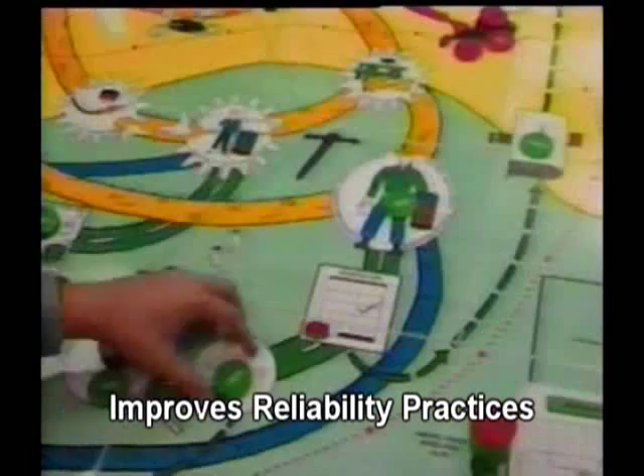The manufacturing game is an interactive simulation that has helped numerous facilities around the world vastly improve their reliability practices in a short period of time by building the culture required for significant and lasting change. Our unique integrated approach aims to help organizations realize their full potential by encouraging frontline workers to better understand their role and take responsibility for their performance as it relates to the functionality of the entire plant through defect elimination.

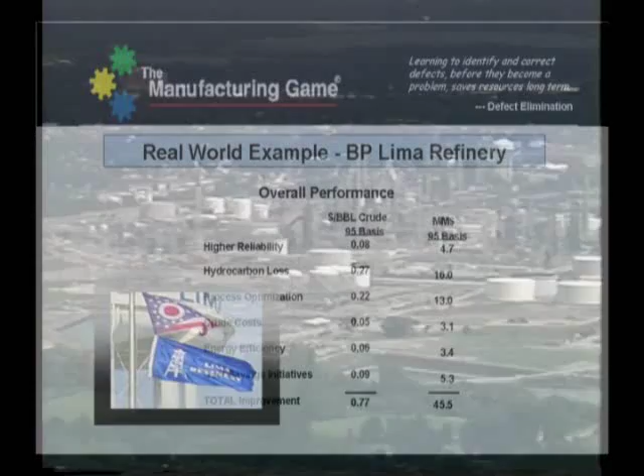One example of how well the manufacturing game works is a refinery in Lima, Ohio. Because of their participation in manufacturing game workshops and defect elimination practices, they improved operational profits by over $40 million a year, tripling their earnings in 3 years.

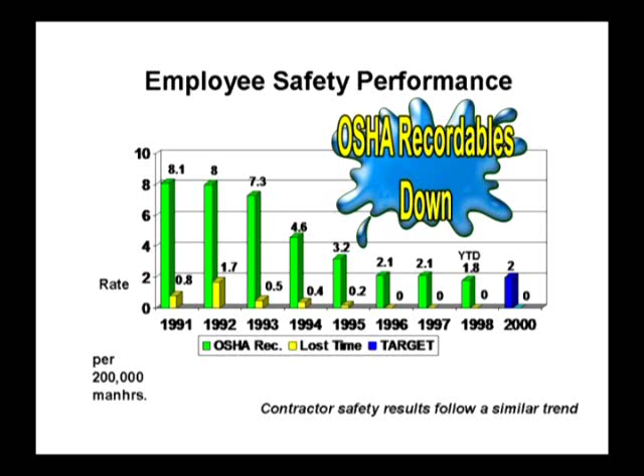During that time, not only did safety also improve, but OSHA recordables dropped from 8 per 200,000 man-hours to 2, and they experienced 5 years without a lost workday case. Environmental impact was reduced, contributing to profit by reducing crude losses from 1.3% to 0.3%, a pace-setter performance for any refinery.

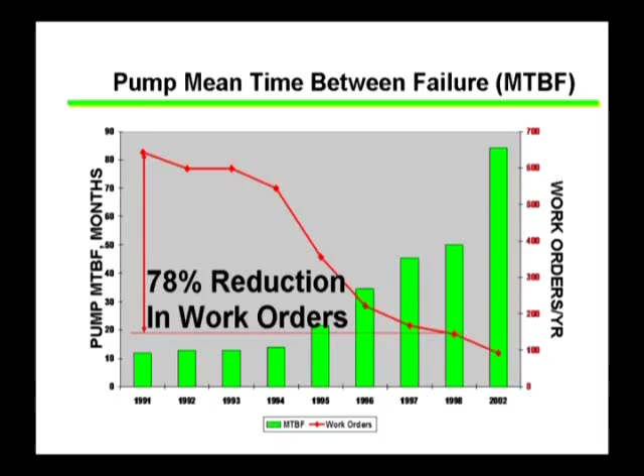Mean time between pump failures changed from 12 months to 50 months, which accounted for $1.5 million in cost savings, but more importantly, it reduced the number of work orders on pumps by 78%. The total workload for the maintenance people dropped by 37.5% in those 3 years.

In the next 5 years, they cut the workload by another 50% in maintenance for an overall reduction of 70% in maintenance work orders. Their budget for maintenance dropped 60%.

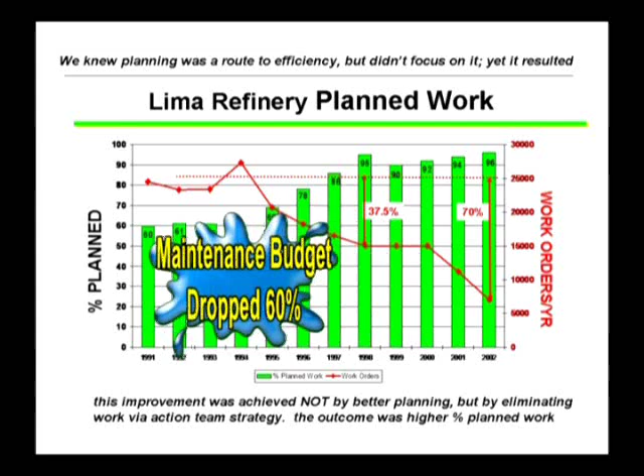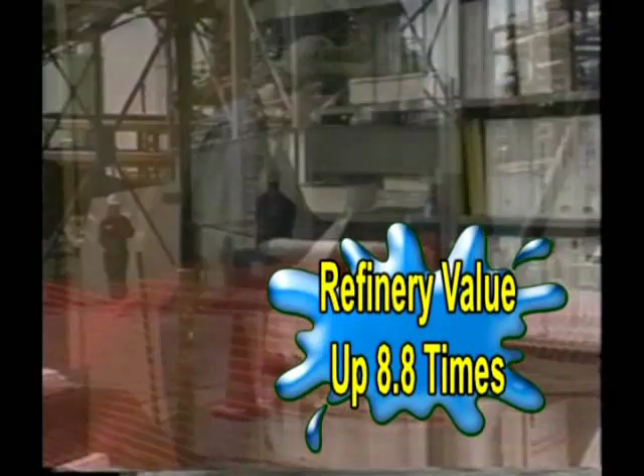Lima employees did not realize it at the time, but through their hard work to keep the plant profitable, they would ultimately increase the value of the refinery by a factor of 8.8 times, not only saving their own jobs, but ultimately saving their plant from closure.

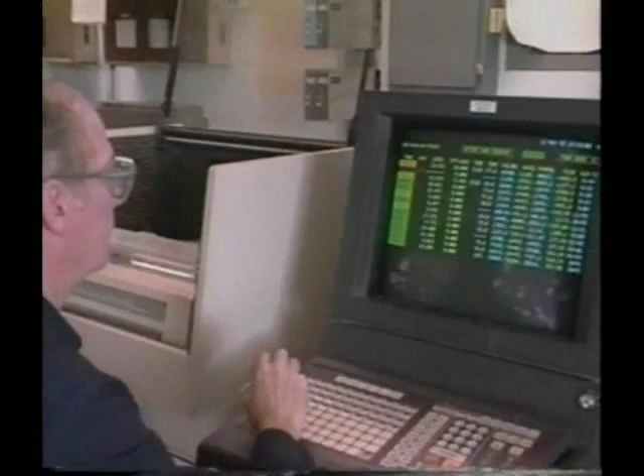These improvements are continuing after 13 years without outside help. This was sustained through 4 changes of ownership and many managers.

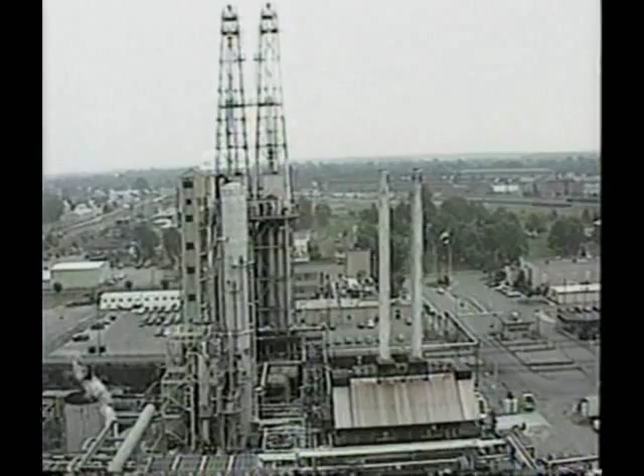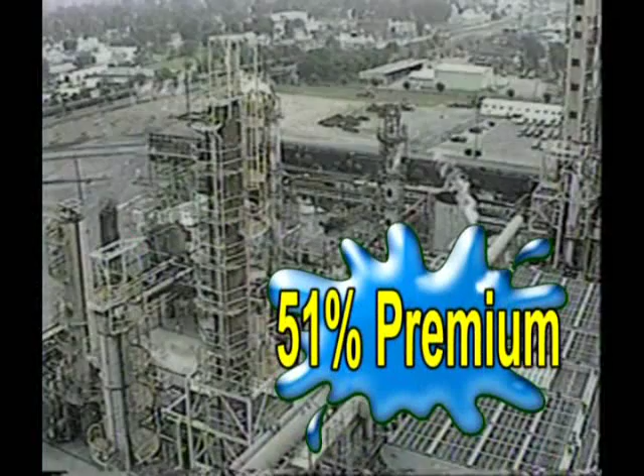The first sale of the refinery in 1998 was for $215 million. With the dramatic improvements in profitability, reliability, safety, and productivity, the Lima refinery was sold the 3rd time to Husky Energy for $1.9 billion, which the Wall Street Journal pointed out was a 51% premium over the other refinery that was sold in the U.S.

that year. Would you like to find out how they achieved those staggering results?

We offer the manufacturing game as a 2-day in-house workshop for groups of 24 to 36 people. On the first day and a half, participants experience the exhilaration of playing the manufacturing game, while the second half of day 2 is dedicated to applying the lessons of the game to the real world by forming on-the-job action teams to accomplish improvement objectives and improve the reliability of your equipment.